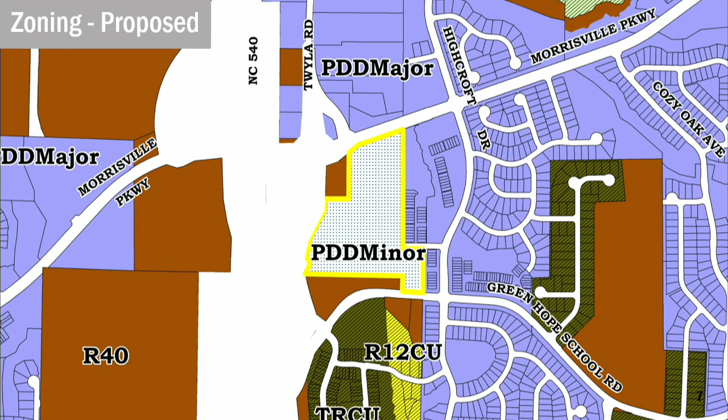The site is zoned R40 and Watershed Protection Overlay District. The applicant is requesting to rezone to PDD minor, and the Watershed Protection Overlay will remain.

The PDD proposes 3 subdistricts. C1, which would be limited to no more than 12,500 square feet of commercial uses and 17,000 square feet of office uses. RMF1, which would be limited to a maximum of 104 multifamily units. And R1, which would be limited to up to 85 townhomes.

This has been reduced from 95 townhomes since the council public hearing.

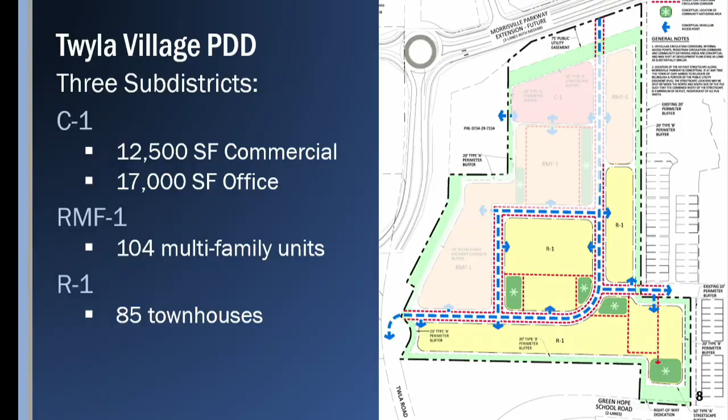This is a list of all the commercial uses typically permitted by right or as a special use in the general commercial zoning district. The proposed PDD would limit the uses to those shown here in its C1 subdistrict. After removing a number of uses, we are left with the following list, which is reorganized on this next slide to be more legible.

Proposed uses include banks, offices, restaurants without drive-throughs only, retail and personal service uses, veterinary hospitals with indoor kennels only, and several other uses. Since the Town Council public hearing, a veterinary hospital with an outdoor kennel has been removed from this list, and restaurants, again, have been limited to those without drive-throughs.

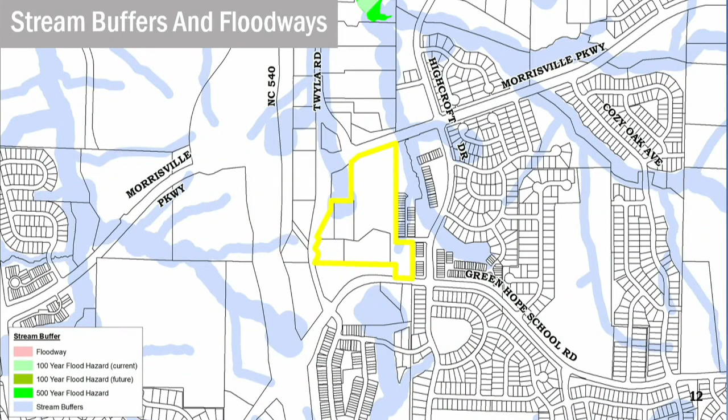Portions of the site are impacted by stream buffers, but field determination of such features shall be required at time of development plan review.

An analysis of the request against the Imagine Cary Community Plan finds that policies in several chapters of the plan apply, including the live, work, shop, and shape chapters.

The Future Growth Framework map identifies this site as being within a commercial center. Commercial centers are typically defined as having a shopping center of 5 to 10 acres or more and are intended to serve nearby residential neighborhoods.

This request proposes a maximum of 29,500 square feet of non-residential uses, which could include up to 12,500 square feet of commercial uses. By area, approximately 11% of the project is designated for these non-residential uses.

The applicant has offered a phasing condition ensuring that certificates of compliance for at least 10,000 square feet of these non-residential uses will be issued prior to building permits being requested for more than 150 units, and an additional 10,000 square feet being completed before permits for more than 180 units are requested.

Looking at the commercial center as a whole, it includes the recently approved Twyla North PDD and the Lowe's at Greystone Shopping Center, which will be anchored by a grocery store.

These 3 proposed developments, which together comprise almost the entirety of the commercial center at this interchange, would provide between about 65,000 and 142,000 square feet of commercial and office uses, a hotel, and up to 584 residential units.

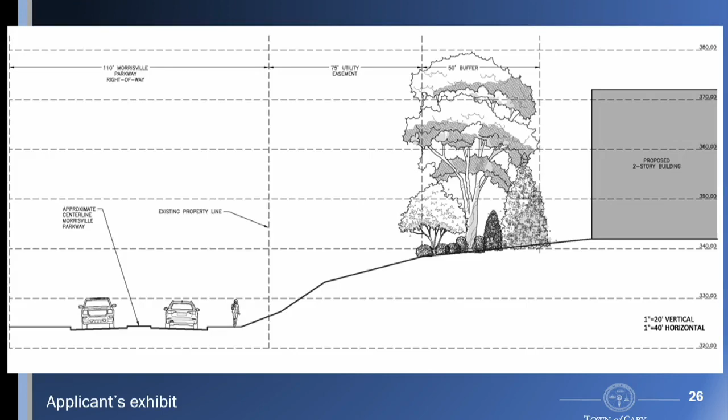In response to this last item, the applicant has since submitted a diagram indicating the elevation differential between Morrisville Parkway and the edge of the development. The diagram indicates the site will sit approximately 17 feet higher than the adjacent roadway.

Since the public hearing, the applicant has indicated to staff that there is a 75-foot wide public utility easement impacting the property frontage, shown here, which requires the streetscape to be moved further back from the site and will slightly reduce the overall developable area of some of the sub-districts.

The applicant has reduced the overall residential unit count by 10 to account for this reduction in size. The applicant has also added a note to the PDD to allow the opportunity to work with utilities at the time of development plan to potentially reduce this easement if feasible at that time.

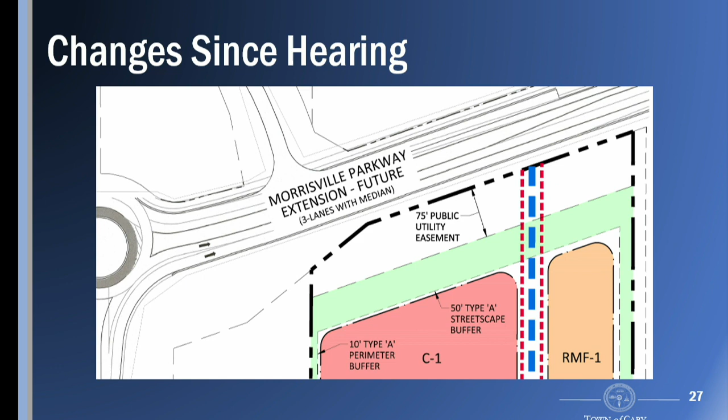The applicant has also added or modified some provisions of the PDD. Again, veterinary hospitals with outdoor kennels and restaurants with drive-thrus have been excluded from the uses permitted in the C1 tract. The maximum number of townhouses has been reduced to 85 units, reducing the overall residential component to 189 dwellings maximum.

Community gathering space has been increased from 12,000 square feet to a minimum of 20,000 square feet, which is 5 times the LDO requirement. Community gathering spaces will be in the approximate location shown on the master plan, and each is to be amenitized with benches, trash receptacles, and pet waste stations, as well as at least 2 other amenities from a pick list which includes plazas, planting beds, dog parks, playgrounds, water features, and public art.

Conditions have been added to provide amenities along internal streets, including benches, decorative crosswalks, decorative street lighting, and pathway stations. Finally, the applicant has offered the previously mentioned phasing condition for the commercial tract to receive certificates of compliance for at least 10,000 square feet of non-residential area prior to requesting a building permit for the 151st unit, and at least 20,000 square feet of non-residential area prior to the permit for the 181st residential unit.

Staff finds that the request is consistent with some policies of the Imagine Cary Community Plan. The request supports multiple policies in the LIVE chapter, especially as it provides housing options both within the development and in a larger context. It does partially support work and shop policies by locating some non-residential uses in the development, which could provide opportunities for employment, as well as smaller commercial uses accessible by residents within and near this development. The proposal provides some horizontal mixing of uses and does provide use-informed transitions quite well. New conditions ensuring increased and amenitized community gathering spaces, along with a 50-foot streetscape along Morrisville Parkway, help meet the quality and attractive appearance of development policy.

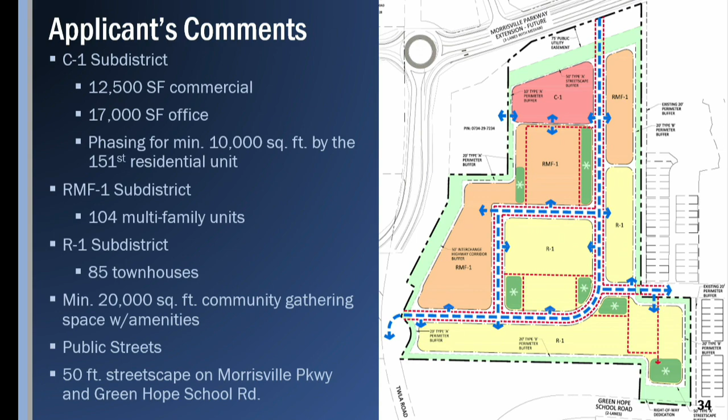Okay. And on the other areas, let's say to the east and to the south, the 20-foot type B buffer is what was being required. So there's no other reduction in buffers, with the exception where they're abutting the increase of the 50-foot type A, where it's adjoining Green Hope School Road, and also to the north, where they've increased the buffer.

I'm just trying to get the net buffer down.

For the vast majority of the perimeter, they're offering what would be required under the LDO. Since this is a PDD, they can request to set their own standards. As you noted, the streetscape on Morrisville typically would require 50 feet for residential, 30 feet for commercial. So if we treat that commercial pod as its own little development, they would actually be exceeding what we would typically require for commercial.

Okay, thank you, I don't have any other questions right now. Actually I do have one question: what's the difference between a PDD major and minor? This is referred to as a minor, so what constitutes a major and a minor?

It's based on the acreage. PDD minor is 10 to 25 acres, and 25 and up is major. I can never remember if it's a 20 or 25 acre cutoff, sorry.

Okay, thank you. There's one member up here that said it all depends what key it's in. So that's what we're laughing about. Thank you.

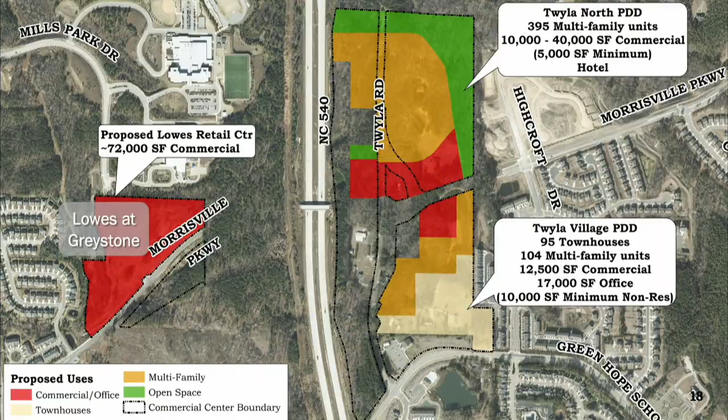There is a range in your staff report of what that would look like in total. On the low side, if everything builds at its minimums, it could be about 65,000 square feet of commercial and office space in this area, or a little less, and could also include a hotel in addition to that 65,000. It could be as high as about 142,000 square feet if everything builds out at the full commercial allotment these three sites are entitled to.

Do you have the percentage? I don't, but we can certainly get that information and put it in the report as it goes forward. I think that would be important, because if it's still a low percentage overall, then I don't think that it... That's certainly fair, yes, we can get that. Okay, thank you.

It would also be interesting to see without Lowe's, because Lowe's is one store, and it has such a large footprint it may bump up the numbers if you're looking at it as a concentration. I'd be curious what the percentages would be across on the east side. We can certainly get that.

Okay, thank you. Ryan, can I ask a follow-up question? I think one of the things about the town of Cary and commercially zoned property is you sometimes drive around and see vacant property. So I'd be curious if staff could look at this, or maybe this is something you're already thinking about. When I look at this proposed development and how it's laid out, it makes a lot of sense to me, and it seems like, how can we look at commercial not only in relation to the parcels in and around it, but more throughout the entire town?

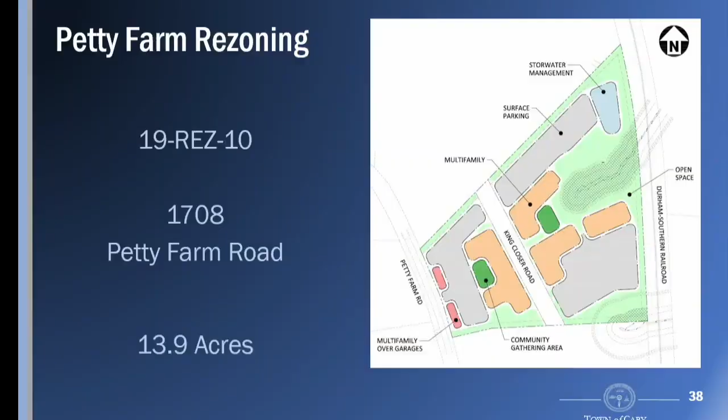This proposal is a request to rezone approximately 14 acres located at 1708 Petty Farm Road to allow a multifamily residential development.

The site's located in the Alston area. It's bordered by the Brickyard to the north, the CSX Railroad to the east, and by a single-family house and undeveloped property to the west and south. The Alston Town Center and Panther Creek High School are located nearby on the west side of NC 55.

The site's currently used as a lumberyard and has an older dwelling that's now used as an office. Our GIS records indicate that there are stream buffers on the property. The exact location of these features would be determined as part of development plan review.

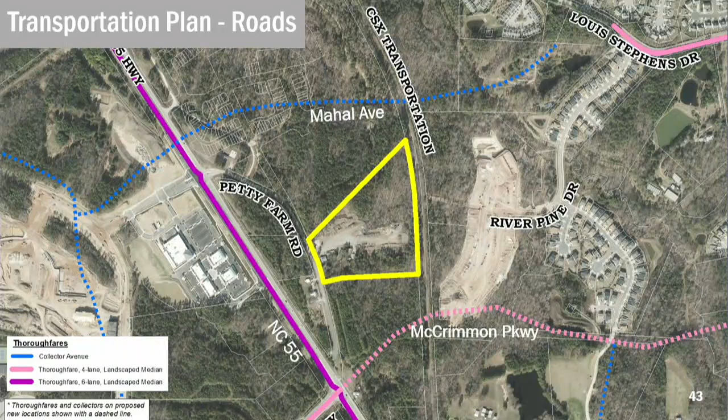There are not any existing parks or greenways near the site. The site has frontage on Petty Farm Road, which is a dead-end, two-lane local street. The town's adopted roadway widths map shows Mahal Avenue to the north of the site, shown here in dashed blue, which is being constructed by the Brickyard as a collector avenue. The future envisioned alignment of McCrimmon Parkway, shown here in dashed pink, is to the south, and that would be a 4-lane thoroughfare. Again, NC 55 is located just west of the site.

GoCary does not currently provide service in this area. GoTriangle has a route that runs along NC 55, although the nearest stop is just over 1 mile south of the site at NC 55 and Morrisville Carpenter Road.

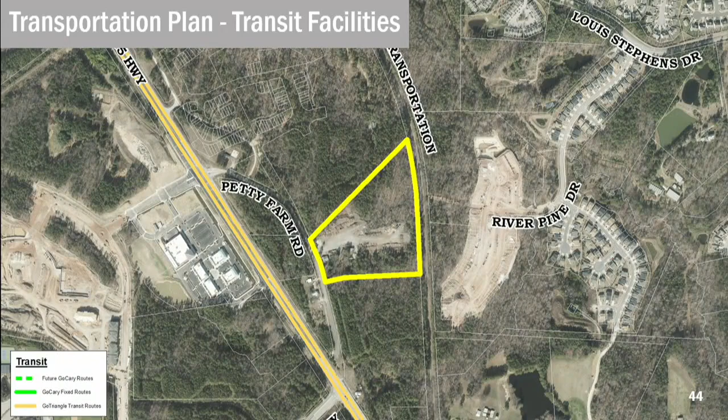So what is specifically being requested? The applicant wants to build an apartment community on the site.

There are three zoning scenarios by which development could occur on this site. The first scenario is to develop in accordance with the base zoning district. In this case, the base zoning is Office, Research, and Development, or ORD. The applicant doesn't want to develop office or research-related uses on the site, though, so the base zoning doesn't work for an apartment community.

The second scenario is to develop in accordance with the Alston Activity Center concept plan, an overlay district that's very prescriptive, structured, and complicated. The plan calls for a mix of uses, and this option does not work very well in this situation either.

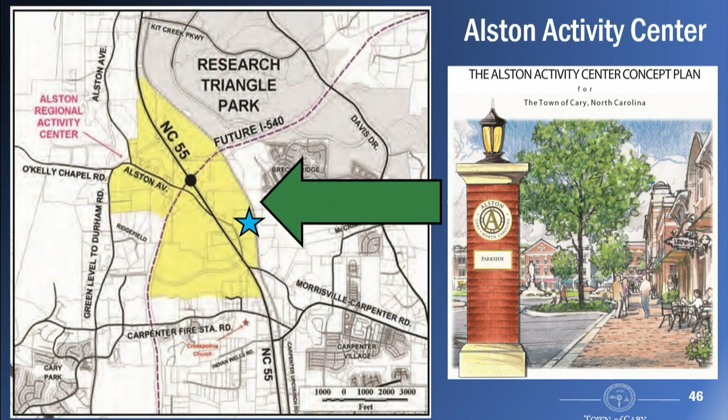This brings us to the final option. When the Imagine Cary Community Plan was adopted in 2017, it identified the Alston area as a destination center, thereby providing the ability for a developer to ask for something different with more density. Since the existing base zoning and the Alston Activity Center concept plan overlay zoning do not work for an apartment community by itself, tapping the destination center designation is the only scenario that may be utilized to build an apartment community on the site.

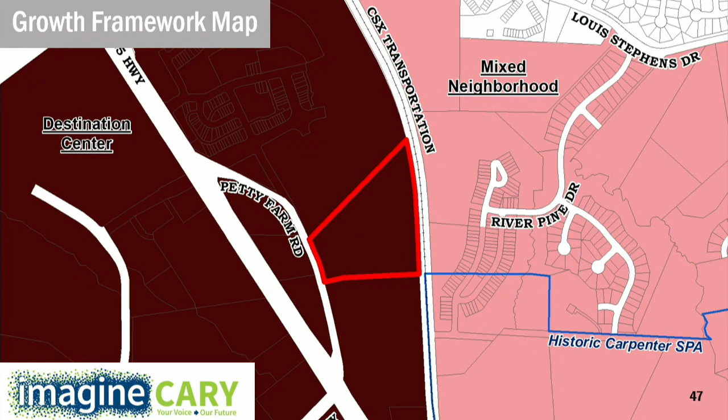Per the LDO, the only zoning district available for a destination center is Mixed Use District, or MXD. Thus, the applicants requested MXD zoning for the site.

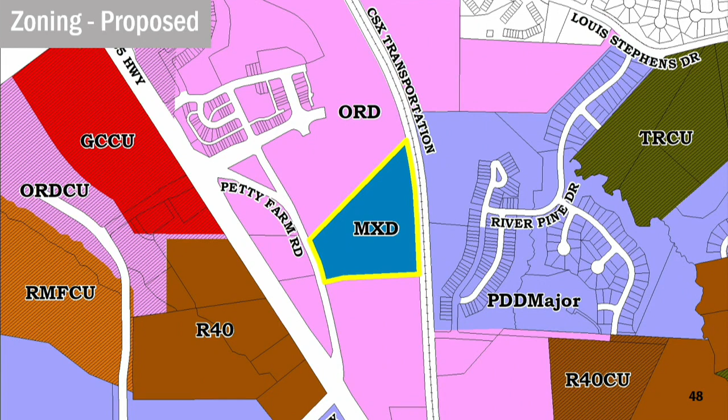So if approved, the MXD zoning would replace the existing ORD base zoning and the Alston Activity Center concept plan overlay zoning for the site, effectively creating an area that would no longer be regulated by the Alston plan. At the same time, it's reasonable to consider the requirements of the Alston plan as part of evaluating the proposed MXD zoning for the site.

In this neighborhood, non-residential and/or mixed use are envisioned to frame the neighborhood's main street and be located adjacent to NC 55 and the future McCrimmon Parkway to the south. Residential uses are intended to be conveniently located for work and play, and it's noted that topography and stream buffers may limit building footprints in this area.

The Alston plan regulates land use, density, and design standards through both design zones and traffic analysis zones. The Petty Farm neighborhood includes 2 design zones, Neighborhood Center and Neighborhood General. The site includes land in both of these zones.

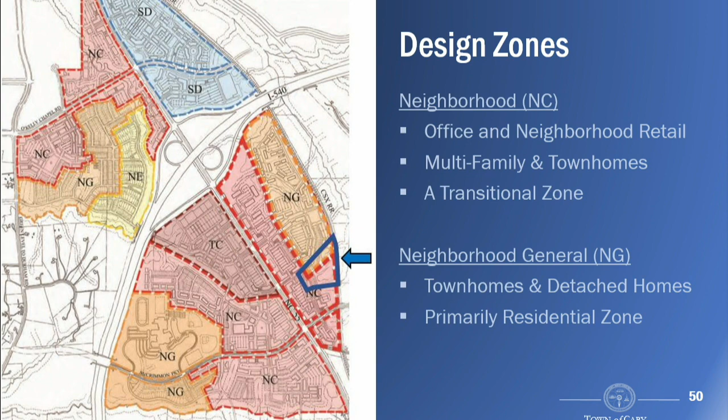Neighborhood Center, shown here in pink, is intended to include office and neighborhood retail, as well as apartments and townhouses. Neighborhood General, shown here in orange, is intended to be primarily residential with townhomes and detached dwellings.

The site's also located in Traffic Analysis Zone 15, or TAZ 15 for short. This zone, which is basically the southern half of the Petty Farm neighborhood, envisions predominantly office uses with up to 400,000 square feet of office, 60,000 square feet of commercial, and 355 residential dwelling units throughout the zone.

So between the design and traffic analysis zones, we could summarize that the Alston plan calls for a mix of uses in the southern half of the Petty Farm neighborhood, with office as the predominant use and retail and residential playing a secondary role.

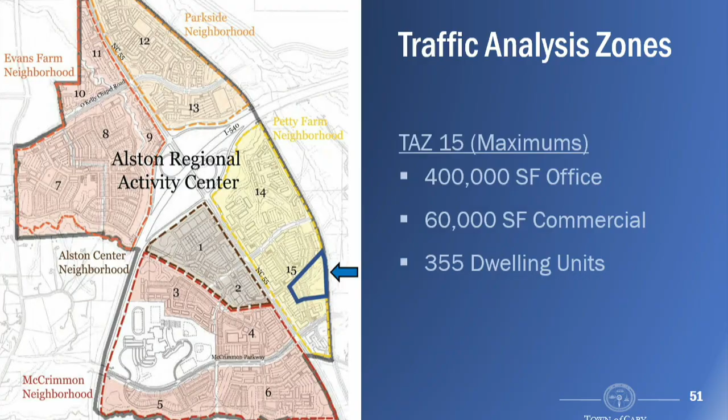The proposed MXD zoning is accompanied by a required preliminary development plan, or PDP. In addition to limiting the number of apartments on this 13.9-acre site to 320 units, the PDP also includes minimums and maximums for the number of bedrooms in each unit.

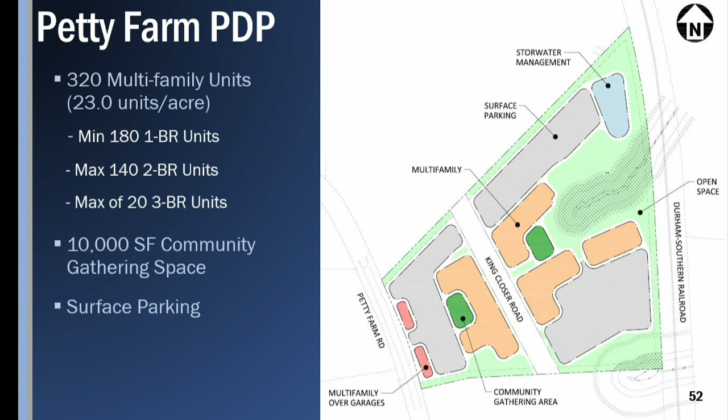The plan provides 10,000 square feet of community gathering space, which is 4 times the minimum amount required. The plan also identifies areas for surface parking, along with a few locations where garage parking will be provided.

MXD zoning provides the opportunity for its associated preliminary development plan to propose and incorporate alternative standards to achieve the right formula of land uses, scale, intensity, and site design for success. This proposal requests 3 alternative standards.

The first is a parking reduction of between 37% and 38%, and the variation depends on how many, if any, 3-bedroom units are built.

The second is a proposal to remove the requirement to provide at least 24 square feet of individual enclosed storage space with an external entry for each unit.

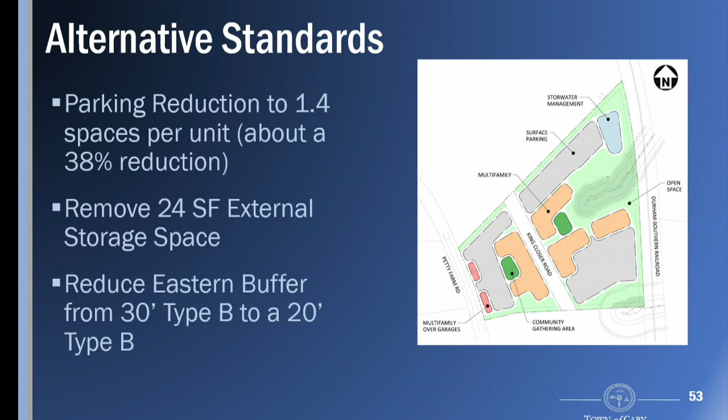And finally, the third alternative standard is that the applicant is proposing to reduce the eastern buffer from a 30-foot type B to a 20-foot type B. The buffer would still include all of the required plant material.

Property owners within 800 feet of the site were notified regarding the public hearing. This exceeds the state requirement of notifying adjacent properties and the LDO requirement of notifying those within 100 feet.

A total of 6 citizens attended the neighborhood meeting on June 5th. Questions focused on the future of Petty Farm Road, whether traffic would drive through the site, if the Petty Farm neighborhood would still be mixed use, and whether large buffers would be needed if this site is apartments.

The council public hearing was held on October 10th, 2019. No citizens spoke at the hearing. Council comments addressed whether the northern Type B buffer provided an appropriate transition to the adjacent Brickyard development, the amount of the parking reduction, the architectural appearance of the units, and the lack of any proposed transportation improvements. There have been no calls or emails since the public hearing.

There have been changes made since the public hearing. The applicant has proposed to change the 20-foot northern buffer from a Type B to a Type A. They've reduced the number of units from 350 to 320. They've added detailed architectural conditions to the proposal, and they've increased the amount of gathering space from 2,500 square feet to 10,000 square feet.

Based on staff's review of the proposed rezoning and PDP, we believe there are some key issues that merit additional discussion. As proposed, the LDO would normally require 720 to 730 parking spaces for this 320-unit development, for both residents and guests. The applicant is proposing a ratio that would provide 448 spaces, a reduction of 37 to 38%. Normally, the LDO limits reductions to a maximum of 30%.

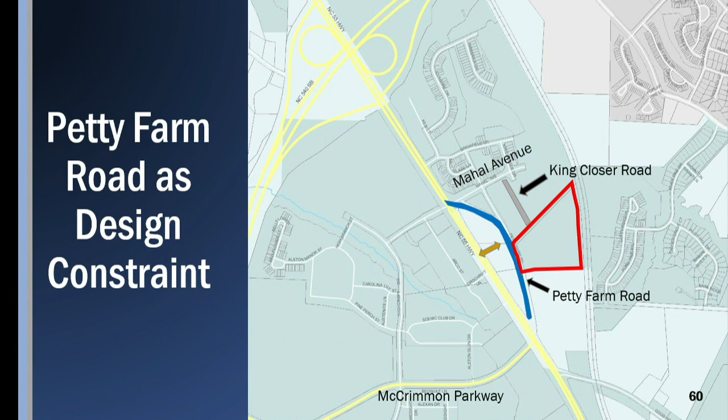Although the Alston plan's applicable design and traffic analysis zones call for mixed use and predominantly office uses in the Petty Farm neighborhood, the new MXD base zoning proposed for the site would only allow multifamily residential uses. And although the site only makes up about 25% of TAZ 15, the 320 dwelling units requested for this site would effectively utilize almost all of the residential units envisioned for all of TAZ 15.

In comparison to the Alston plan, adopted in 2006, the Imagine Cary Community Plan's Future Growth Framework Map, adopted in 2017, identifies this area as Destination Center. Destination centers are described in the plan as Cary's premier mixed-use centers that include an integrated mix of commercial, office, and residential uses arranged in a walkable pattern with an active pedestrian realm where buildings front streets. Destination centers are intended to contain the greatest development intensities in Cary and be regional destinations.

Accordingly, the plan describes the character of such areas as urban, with multi-story buildings that frame the streets. Structured parking is encouraged, along with well-defined street and pedestrian networks and multiple outdoor gathering spaces.

On balance, we believe that if the area around this site develops in a non-residential manner in the future, then this proposed use on this specific site is situated in such a manner that it could contribute to a future mixed-use outcome in an incremental manner, and is thus an acceptable proposition for this site from a land use perspective.

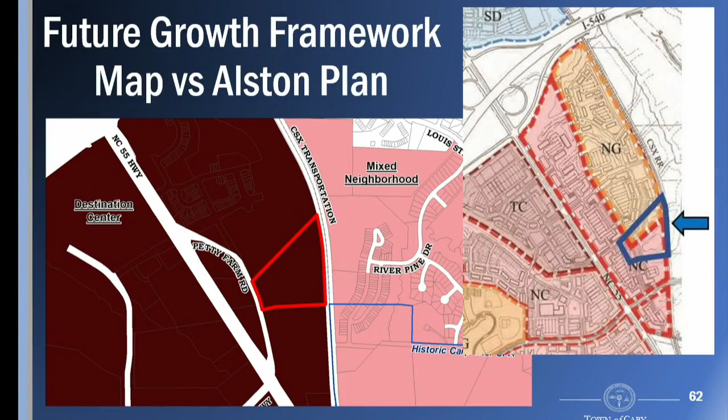In staff's analysis of the Imagine Cary Community Plan, we've also observed that the request does pursue several of the policies of the Live, Work, and Shape chapters. In particular, apartments would provide another housing option and greater variety by adding a third type of residential dwelling, in addition to the townhouses and detached single-family homes in the adjacent Brickyard development.

This proposal would convert the lumberyard for residential purposes. The additional dwellings would support the workforce in close proximity to RTP, and they would provide units that could support other non-residential development in the future.

Finally, while the case could be made that the proposal is not consistent with the Alston Activity Center concept plan, the actual question is whether or not the proposal is consistent with the destination center use type in the Imagine Cary Community Plan. We believe that on balance, the case can be made that the proposed use contributes incrementally towards the vision of a destination center designation, and thus we find it to be consistent with the community plan.

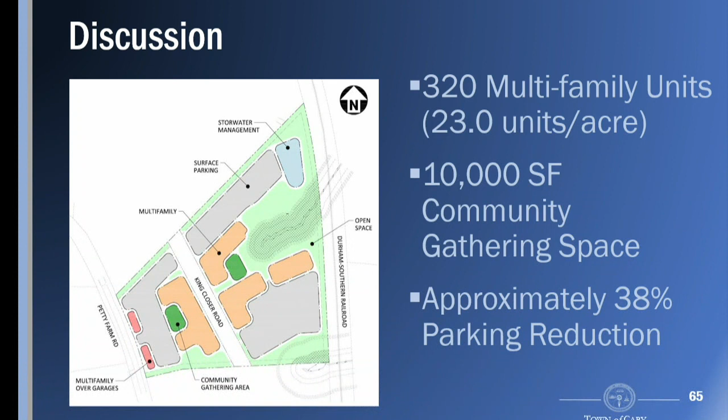And how big is the buffer between the surface parking and those patio homes? They're proposing a 20-foot type A buffer. No buffer is required in a destination center, but they proposed 20-foot type B. It was mentioned whether or not that was an appropriate transition, so they've upgraded it from a type B to a type A, which is our highest level of screening. I mean, I would just think you'd want, if I was in one of those patio homes—and they're not here to talk because they're not here yet—you'd want some transition there. You wouldn't want to just have a parking lot backed up to a home. So there'll be a type A buffer there now.

Yes, that's what they've proposed. Okay, that's it. Thanks.

Sorry, Katie Malimian, Crescent Communities. I was going to add to that. There is a buffer. Meritage is selling these parcels, single-family parcels. This is the backside of the homes or backyards that go into the buffer, and the parking lot sits below grade. So there is a retaining wall that goes along the Meritage site, so that there are no headlights or anything looking into the back of the homes.

But theoretically, the apartments themselves look like they're pretty far back. They're going to be multi-story, kind of elevated over—they'll see down onto those homes, but it seems like they'd be fairly far back. It is fairly far back, and on that side they're 4-story. Yep, okay. We don't want to look into single-family homes as much as they don't want.

No, and like you said, that was my concern—headlights shining into the back of someone's house. You know, that would be a future problem. Okay.

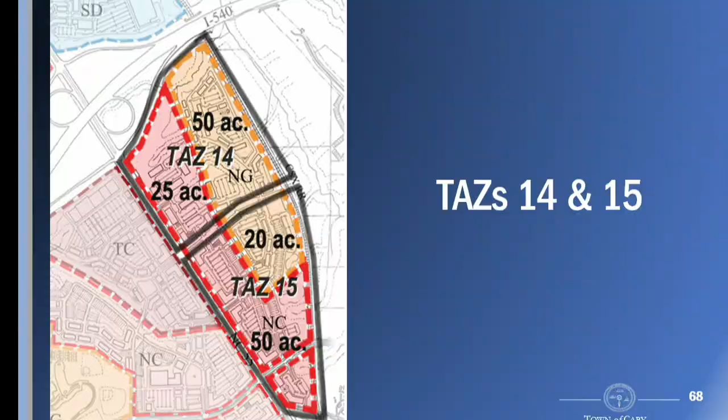As I mentioned, on balance, if the rest of this develops in a non-residential manner around this site, then incrementally you have found your way towards mixed use. So if this rezoning moves forward, then the next most important decision for this area becomes what happens next, and does that deliver the mixed use nature that's expected in a destination center and was originally envisioned, albeit in a slightly different form and fashion.

Any additional questions? I have one more question - what's the estimated square footage of the apartments for the 1-bedroom and 2-bedroom, in terms of the interior? Do you have that? So the average square footage is about 900 square feet.

If I don't have any other questions, I'll look for a motion. I have one other question - so would the applicant be responsible for that section of King Closer Road as part of their development in there? Yes. Okay, thank you.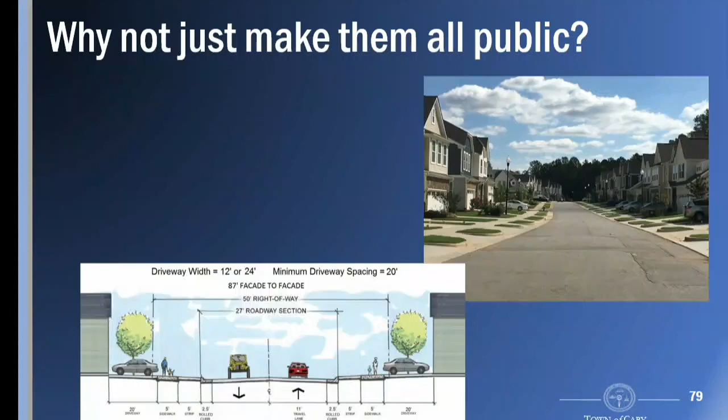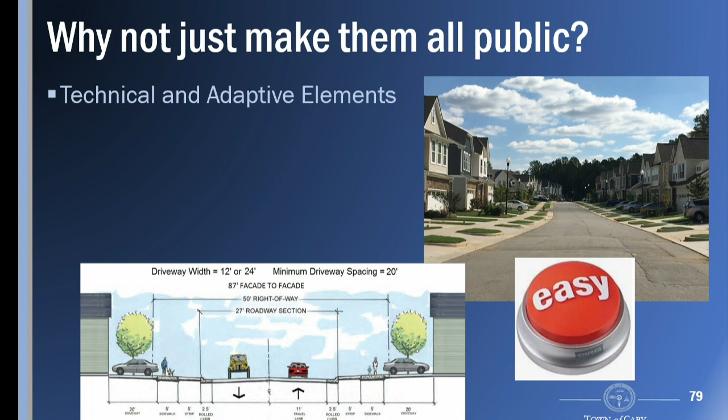At this point, it would be natural to wonder why we didn't just reach for the easy button and require all townhouse streets to always be public. The answer is that the situation is not as simple as it seems on the surface. It involves a combination of both technical and adaptive elements. For starters, if we take our existing 50-foot wide local public street design standard and apply it everywhere, we're going to significantly reduce developer yield, reduce property taxes, drive up townhouse prices, and most likely will significantly reduce the number of townhouse communities being built in Cary.

And this is in a community that's benefited from development through the years, so it should be no surprise that how we go about doing this would be of great interest to the development community and their bottom line.

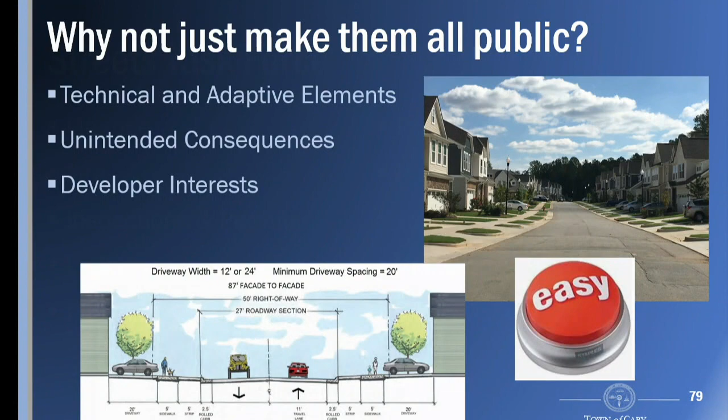Recognizing the complex and multidisciplinary nature of the situation, staff formed a task force, including 24 staff members from 10 different departments. This allowed us to have the resources to take a comprehensive and holistic look at the situation in a truly one Cary kind of way.

The task force started by going out in the field and taking a look at both existing and new townhouse neighborhoods in Cary. We frequently looked down streets in our townhouse neighborhoods and could not help but notice the sheer number of driveways and sewer cleanouts - those little white PVC things you see up and down the street. We couldn't help but notice how many there were and in what close proximity they were to each other.

As far as driveway lengths, 18 feet is the bare minimum to keep a car from hanging out onto the sidewalk, and that's what our ordinance requires. And that's enough on a good day.

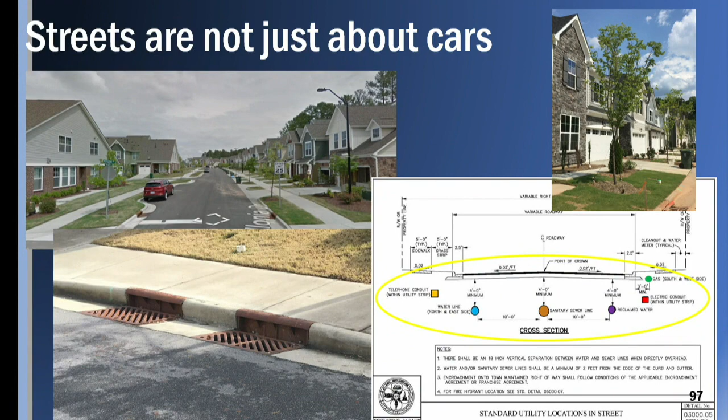How to come up with a solution that would address all of these elements and be mutually agreeable to everyone was the challenge. It was a challenge that required staff to respect each other, break down barriers, and work collaboratively to develop consensus.

Along the way, the task force reminded ourselves of what the Imagine Cary Community Plan tells us to do: be the model of a highly regarded and well-maintained community. Our community values are clearly focused on high-quality neighborhoods, preserving their value and attractiveness over time, offering a diversity of housing price points, and having attractive, well-designed multimodal streets.

At this point, the task force's work and fresh approach to the issue led to the group being asked to present its work at the council's retreat last winter. Working off the momentum that we got from the retreat, staff has finished developing our recommendations and re-engaged with our external stakeholders to get their feedback.

This group included members of the professional engineering and design community, HOA property managers, and we even added townhouse builders. Their feedback was positive, and we made adjustments based on what we heard. So we've achieved consensus, and we're before you tonight with our final recommendations.

The task force's recommendations revolve around three key themes. First, making sure that all future townhouse developments are built with public streets and alleys. Second, providing additional parking and design flexibility. And third, improving aesthetics through better landscaping.

It's important to note that fixing townhouse streets will involve changes to three documents: the Land Development Ordinance, or LDO, the Community Appearance Manual, or CAM, and the Town Standard Specifications and Details Manual. The council must approve changes to the LDO and the CAM, while staff may administratively update the Standard Specifications and Details Manual.

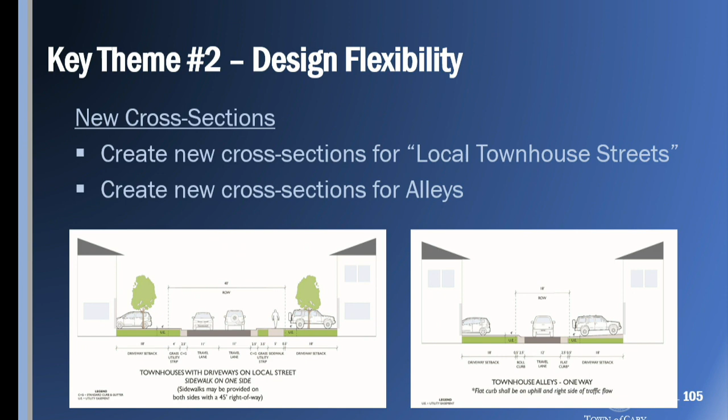Second, we need to make changes to support design flexibility. These changes include new street cross-sections specifically designed for townhouse developments. We need to update our block length and driveway spacing requirements, as well as our curb requirements for alleys. We need to update our local street geometry requirements, which will maintain safety while increasing design flexibility.

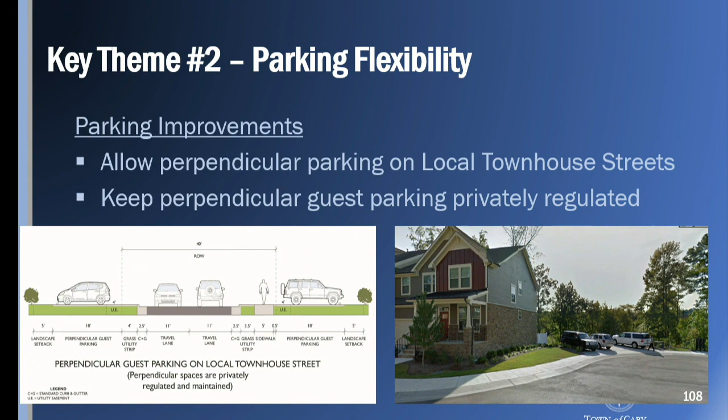We need to make changes to accommodate perpendicular parking. As desired by townhouse communities, the actual parking spaces will be just outside of the right-of-way, so HOAs can continue to regulate who parks in these spaces on their own. Finally, we recommend changes to support parallel parking and make sure that guest spaces are appropriately located with relation to the units they serve.

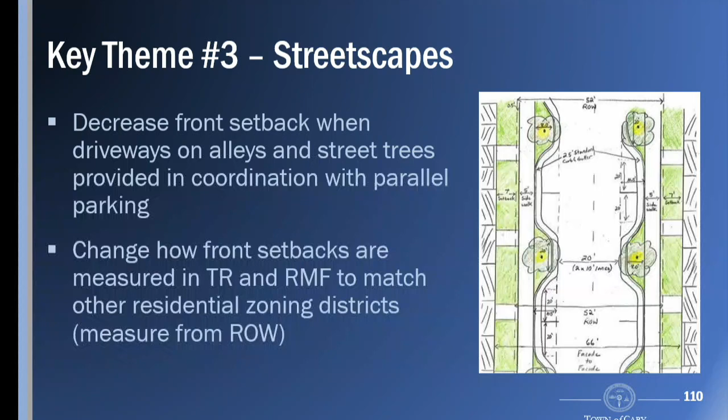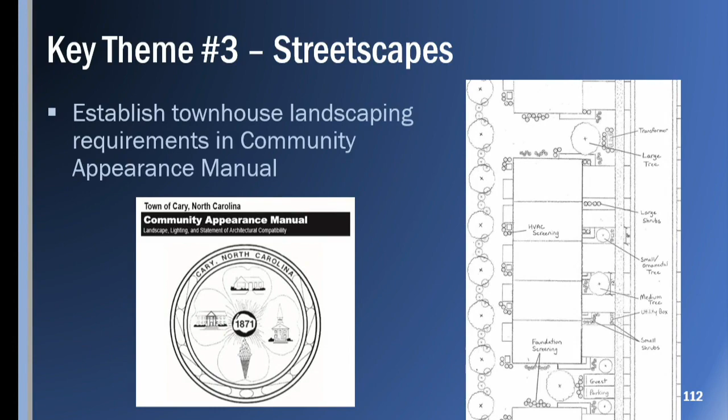Our final theme is improving landscaping. This will be accomplished by tweaking our setback requirements, limiting the number of units in a row, and increasing the spacing between buildings to provide better spaces for canopy trees. Finally, we also propose to add new townhouse-specific landscaping requirements to the Community Appearance Manual.

As previously noted, these changes are accomplished by updating multiple documents. The council will need to approve changes to the LDO and the CAM to support public streets, improve guest parking, add design flexibility, and create townhouse-specific landscaping requirements. And if the council chooses to approve these amendments to the LDO and the CAM, the staff will administratively follow suit and update the town standard specifications and details manual to coordinate with these changes.

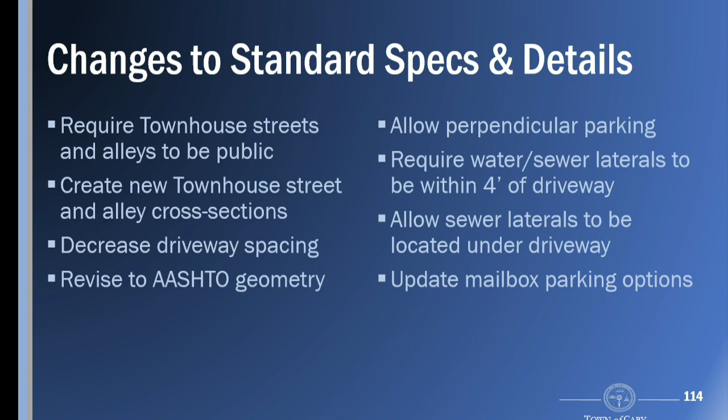Updates would include requiring all future townhouse streets and alleys to be public, adding street cross-sections and alley cross-sections, allowing perpendicular parking, and adding more design flexibility. In closing, there is some give and take here. The amendments proposed require more space between buildings for canopy trees. At the same time, the recommended new 40-foot wide public townhouse street right-of-way is 10 feet, or 20%, smaller than our currently available one-size-fits-all 50-foot local public street right-of-way. We do believe that on balance, the proposed amendments deliver a win-win scenario for everyone involved, and the community will achieve better outcomes, including public townhouse street maintenance and more attractive and sustainable townhouse neighborhoods.

Item B includes 3 amendments that would improve consistency with state law. The first is language that we're required to adopt regarding political signs in town rights-of-way. Since we don't allow political signs in any town-maintained rights-of-way, though, this language will not have any practical impact.

Second, we currently have extra rezoning criteria which are not required by state law. This amendment would remove the extra criteria and only include the items required by state law, thus giving council more discretion when making decisions on rezonings. And finally, in the case of physical hardships with parcels of land, the third amendment would provide opportunities for variances in conditional use districts, planned development districts, and in preliminary development plans.

Item C includes 3 minor and technical amendments regarding accessory building setbacks, the process for correction of zoning map errors, and board references. These items are discussed in detail in your staff report.